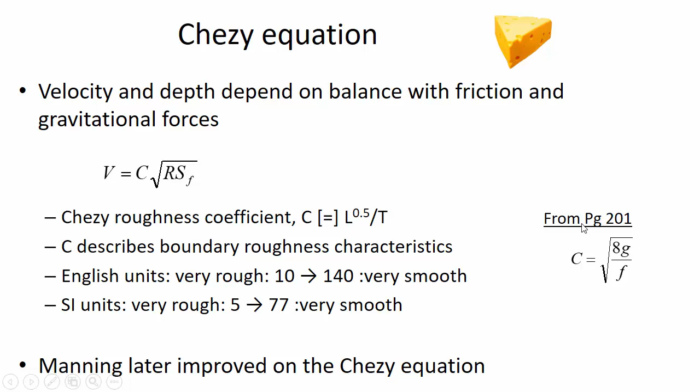There's an equation in your textbook that relates the Chezy equation with the Darcy-Weisbach friction factor F, so if you ever need to convert between the two, it is possible. They set the head loss due to pipe friction equal to each other and solved for C, so that's where that relationship comes from. It's available in the book.

Let's talk a little more in depth about flow through a pipe and velocity distribution. You probably remember from fluid mechanics the idea of the no-slip condition, that if you have a fluid with viscosity, you can't have it changing velocity suddenly. The velocity changes across a cross-section have to be gradual.

This profile shows that at the edge of a pipe, the velocity is zero, the water has the same velocity as the pipe, which is stationary. The further away you get from the edge and closer to the center, where there's less influence from the pipe walls dragging back the fluid and exerting pipe friction, the faster the velocity is. At the center of the pipe, the velocity is fastest.

There's a variety of different shapes. If you have turbulent conditions, the velocity profile may be more logarithmic compared to laminar conditions, where if you have slow-moving flow, the distribution is parabolic.

But the important thing is, with this formula I've given you before for Reynolds number, RE, velocity times diameter divided by kinematic viscosity, which velocity did we use in that formula? For instance, during the fluid mechanics lab, where you had that vertically inclined clear pipe and we were injecting dye downward, what velocity did you put into the equation when solving for Reynolds number? Do you remember how you found that velocity?

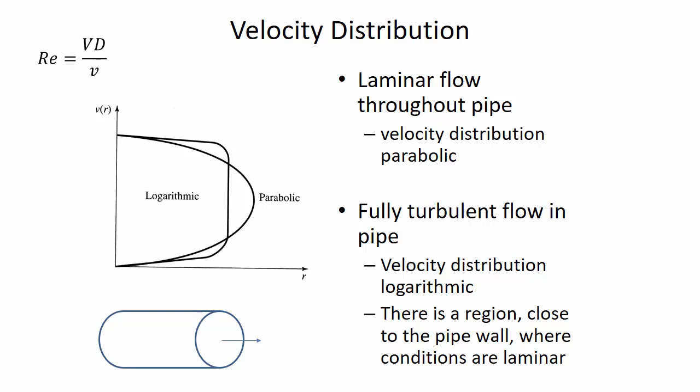So where's that going to be? Where is it in the pipe that even when the whole rest of the section is turbulent, it's laminar in some rare spot? Where is that special spot where the conditions are still laminar? Along the edge? It's at the edge. Exactly right, very good. So here is a graph of that.

Now this is a difficult figure to understand immediately, but I think we'll get there. On the horizontal axis is shear stress. Remember, shear stress is the resistance - the pipe is pushing back against the movement of the water. So if the water is flowing to the right, the pipe is pushing on the water to the left. It's resisting flow. The closer we are to the edge of the pipe, the more resistance there is, so the shear stress is highest right at the edge of the pipe. Down here at this bottom boundary, there's a lot of shear stress, but the further away we get from the edge of the pipe, at the center of the pipe, there's the least shear stress. So far, is that consistent with what we know about velocity profiles?

It is, because the velocity profile says there's the highest velocity at the center of the pipe. It goes hand in hand - there's the highest velocity at the center of the pipe because there's the lowest shear stress. And remember, a shear stress exerted over an area is a shear force. So what is causing resistance is force, and that force was imparted by a stress exerted over an area.

So this curve, or this profile, is just what the shear stress profile looks like for a certain flow rate. If you're putting 10 liters per second through the pipe, we could come up with a graph that shows, as a function of distance from the edge of the pipe, what the shear stress is - how much resistance there is for a certain flow. This is saying what the shear stress profile looks like if you have turbulent flow through the pipe. Even if most of the pipe is turbulent, there's still going to be laminar flow in the vicinity of the edge of the pipe.

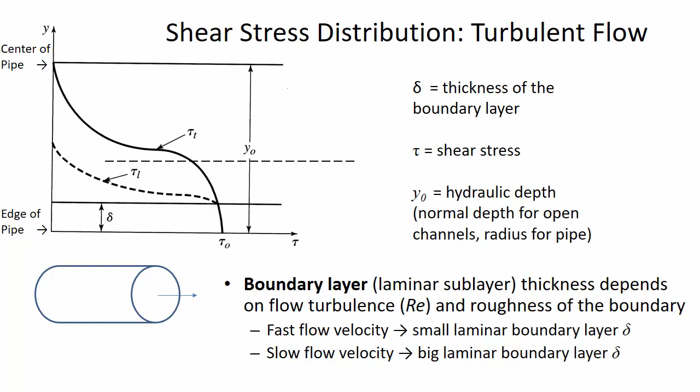Now, different materials have different roughnesses, and we've talked about the K sub S to D ratio, which is that right vertical axis on the Moody diagram. Here, K sub S and epsilon are used interchangeably depending on the text that you've got. These are different materials and their typical equivalent sand roughnesses. We talked about equivalent sand roughness in fluid mechanics. In fact, when we were looking at WaterGEMS for the first time, I showed you how there's a library of materials, and it had that equivalent sand roughness for a whole lot of different materials.

So what it means physically is that if you were trying to represent how rough, for instance, a galvanized iron pipe is, you could have spherical sand grains with a diameter of 0.15 millimeters. If you somehow glued those spherical sand grains to the edge of a perfectly smooth pipe, it would take a diameter of 0.15 millimeters of sand to be an equivalent roughness to, on average, how rough galvanized iron is. Certain materials like glass, copper, or brass are known for being very smooth and not exerting as much pipe friction effect as materials like wood or rough concrete, where the equivalent sand roughness is much larger.

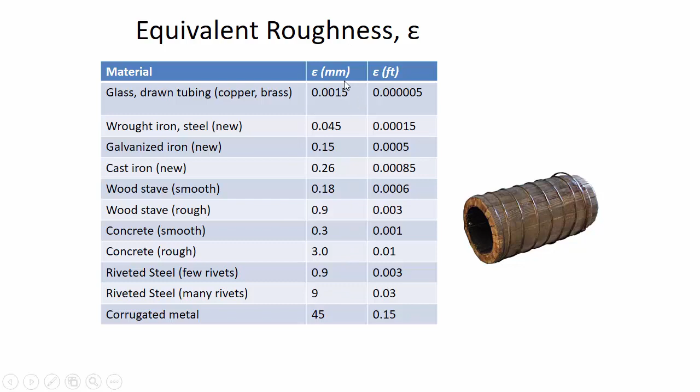In this previous slide, we said this is how rough different materials are. You see these little ridges—you can think of that as the roughness elements on, maybe for instance, a concrete pipe. It is possible that if you have slow-moving fluid, then your laminar zone is thick and it fully submerges the roughness elements. That's what we would call hydraulically smooth.

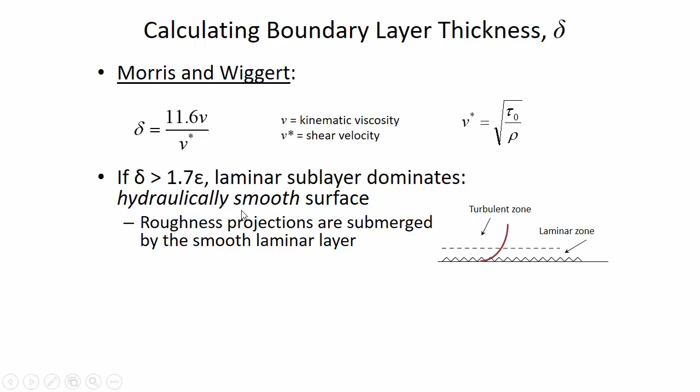If we know that the laminar layer is more than 1.7 times the roughness of the material, then it's definitely hydraulically smooth. By contrast, if it's less than 0.08 times the roughness, then that's hydraulically rough.

So there's a pretty big no man's land in the middle there. In some ways there's an analogy to laminar, turbulent, and the transition region. Remember how there was a transition region between 2000 and 4000 where it's not necessarily laminar and not necessarily turbulent? This is the same thing.

What we're doing is describing three different conditions: the hydraulically smooth condition, the hydraulically rough condition, and then an indeterminate range in between. The reason we distinguish between these is that the head loss performance is very different.

You'll notice in the hydraulically rough case, the roughness elements stick well out of the thickness of the boundary layer. The boundary layer is only 8% of the thickness of the roughness elements. Whereas in the hydraulically smooth case, it's almost double — the boundary layer is almost twice as thick as those roughness elements.

So once we're able to calculate the thickness of the boundary layer, later in the semester we're going to look at the consequences of that, because there are certain assumptions we can make when calculations get really complicated and we're trying to find the friction factor F.

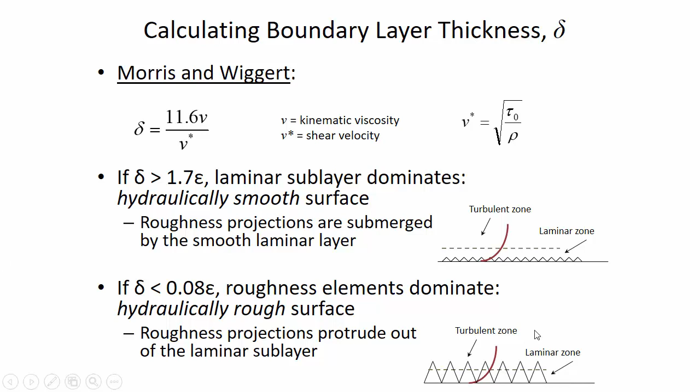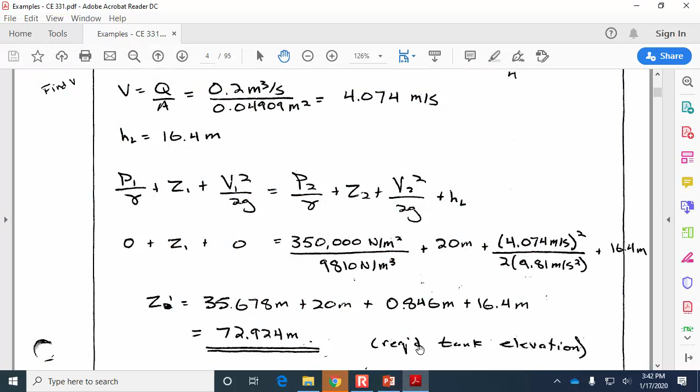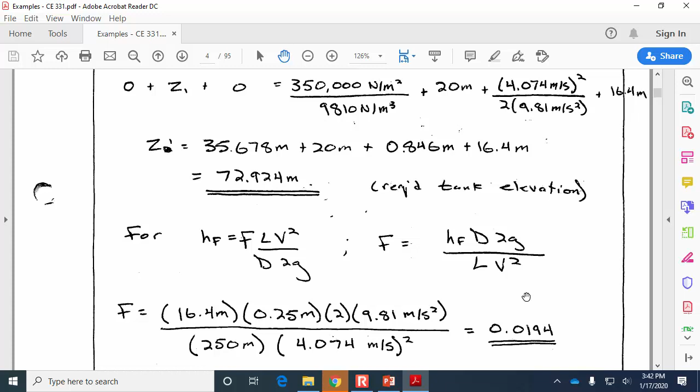Okay, so for part B, what is the friction factor? We can rearrange with the known head loss, the known flow velocity, the known pipe length, and the known pipe diameter. It says the F value should be 0.0194. And so that's how they would calibrate - they can measure all of these things, like the pressure in the pipe downstream, and then extract an understanding of the F value based on that.

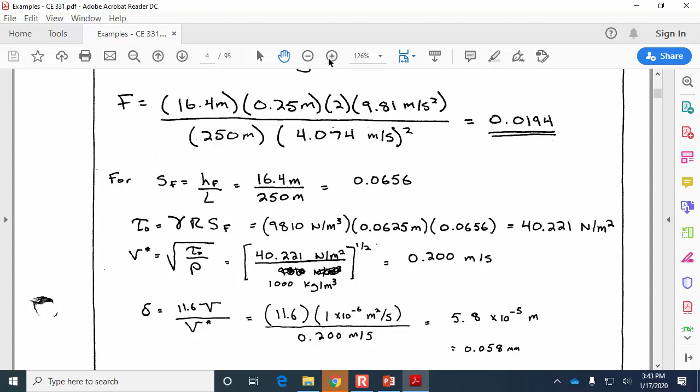The third part was asking what is going to be the thickness of the boundary layer. Let me zoom in here so it's a bit easier to see - we see that boundary layer.

So S sub F, the slope of the energy grade line, is going to be the head loss of 16.4 meters divided by the pipe length of 250. So we got a slope of the energy grade line that's going to go into our calculations of shear stress. The unit weight of water, typical 9810. We don't have any distinct information about an unusual pipe water temperature or anything. Hydraulic radius here of 0.0625 - that can just be the diameter divided by 4, since it's a circular pipe that's flowing full. We don't have to go to the trouble of calculating the cross-sectional area and dividing by the wetted perimeter. For a circular pipe flowing full, it's just D divided by 4.

Substitute in the slope of the energy grade line, and here's the shear stress that's occurring. Convert that to a shear velocity by dividing the shear stress by the density of the fluid and taking the square root. So Morris and Wiggert's estimation is that the thickness of the boundary layer is going to be 5.8 times 10 to the minus 5th meters, which is really small - 0.058 millimeters.

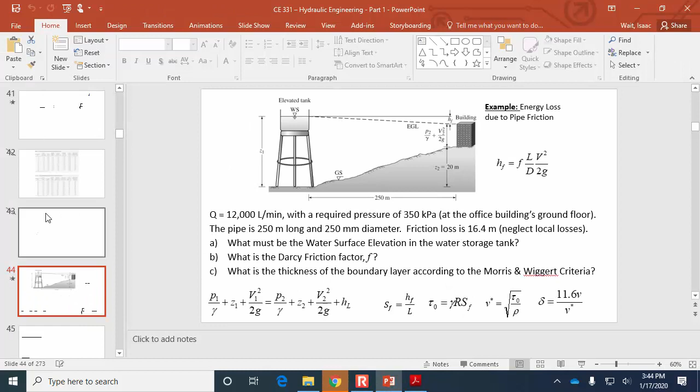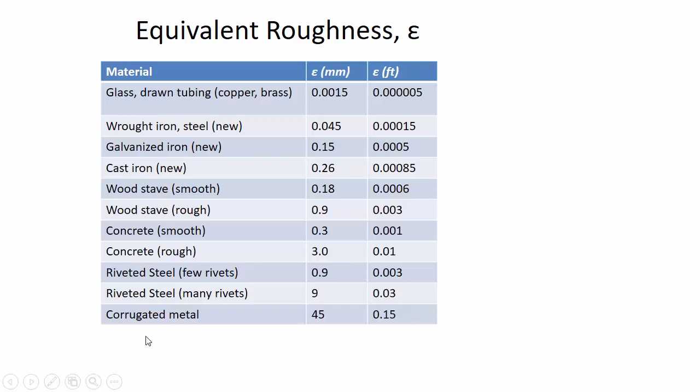Now let's compare that to some typical thicknesses - these are in millimeters as well, so 0.058. If it was a glass tube, copper, or brass, we might still have those elements fully submerged by the laminar layer, but for all the rest, the laminar layer is going to be projecting and protruding past the elements. Think about it like mountains - are the mountains sticking out of the fog, where the fog is the thickness of the laminar layer? The mountains are sticking out of the fog for all of these, with the exception of the wrought iron and the glass, because it was 0.058 millimeters.

Okay. Any questions on the example?

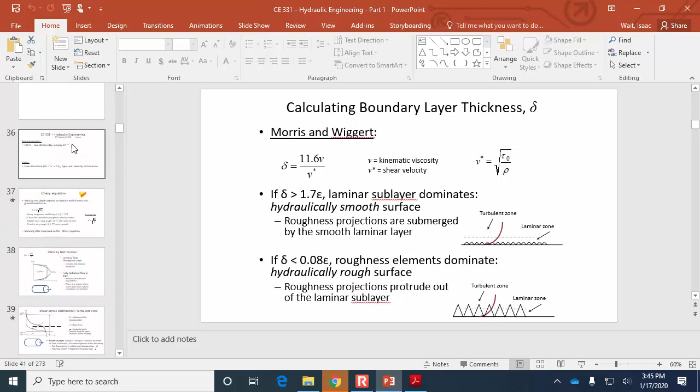Yes? Where did you get 1 times 10 to the negative 6? That is a constant - that's the kinematic viscosity of water, and it varies as a function of temperature, but it's something you can look up in the back of your fluid mechanics textbook, like the dynamic viscosity of water is 1 times 10 to the minus 3rd Newton seconds per meter squared, and the kinematic viscosity is dynamic divided by density. In other words, it's just a constant.

Yeah, question over here? Same thing - where'd this come from? Yep. Good.